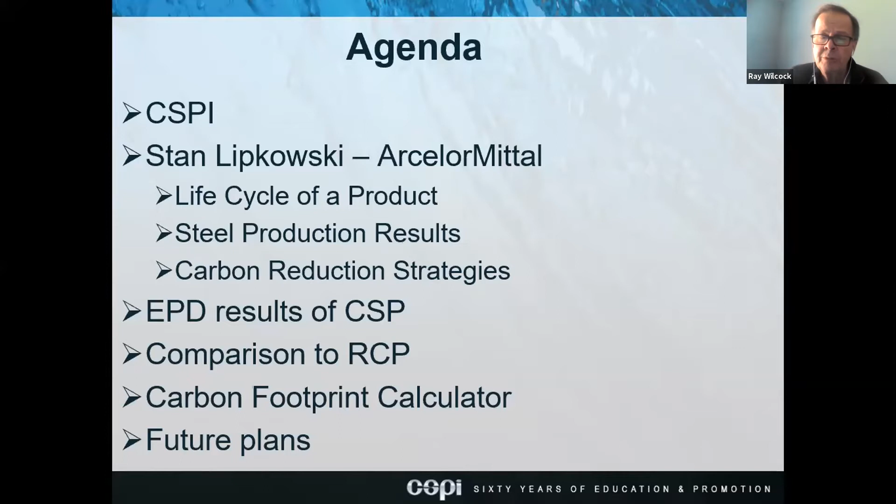The agenda today is I'm just going to spend a couple of minutes on the CSPI, and then I'm going to pass it over to Stan Lipkowski from ArcelorMittal, who's been introduced already. Stan's going to go through the life cycle of a product, steel production results, and carbon reduction strategies, and then he's going to pass it back to me. I'm going to talk about the environmental product declaration results of corrugated steel pipe and structural plate, do a comparison to reinforced concrete pipe, show you a little bit about a carbon footprint calculator, and just talk a bit about future plans.

The Corrugated Steel Pipe Institute represents the manufacturers of corrugated steel pipe and structural plate. Armtec and Atlantic Industries are both national players with plants pretty well right across the country, from Newfoundland to British Columbia. Hubcap and Frontier are both regional players.

We also have in our membership ArcelorMittal Dofasco out of Hamilton, the largest steel producer in the entire world, with something like 60 plants worldwide. We also have Ironside, they make machines. Leland Industries make nuts and bolts. Advanced Coil Industries and Warner Custom Coatings make coatings for material like polymer. AK Steel, a very large steel producer out of the United States, makes aluminized type 2 steel.

We also have members outside of North America, like Velfilm out of Brazil, 2xO which is in Paris, France, Rondell and CMP in Australia, Viacon out of Poland, Marmac out of South Carolina, and Birkenhoek in Amsterdam in the Netherlands. We do a lot of sharing back and forth between the Europeans and the Australians. They learn from us, we learn from them, and we're very happy to have them in our small membership in the CSPI.

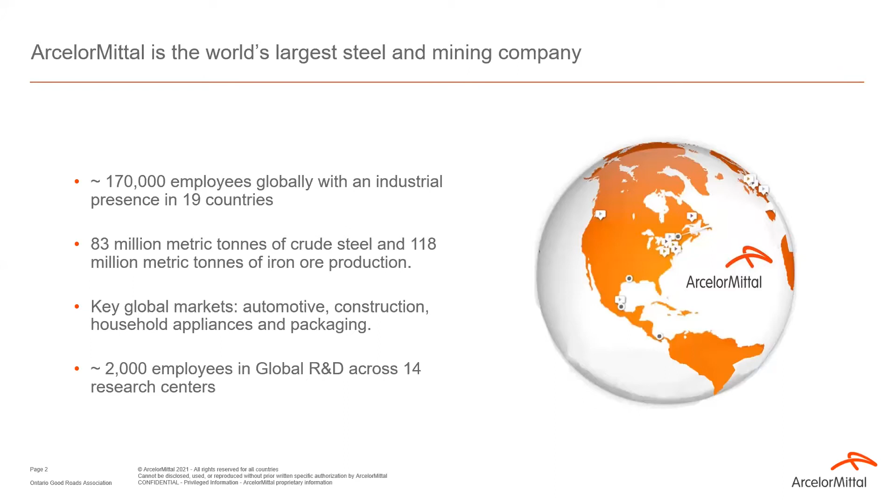Please hold on, everyone, until we... Actually, I was able to flip. It's working on my end, yeah. All right, awesome. What happened? Sorry about that, everyone.

So our footprint in Canada, we have 10,000 employees across Canada, 6,000 employees in Ontario. Our mining facilities are located in northern Quebec, as well as in the Northwest Territories, Baffin Island, very far north. Our steel manufacturing footprint is located in the Montreal area and in Hamilton. Our largest steel mill in Canada, Dofasco, is in Hamilton.

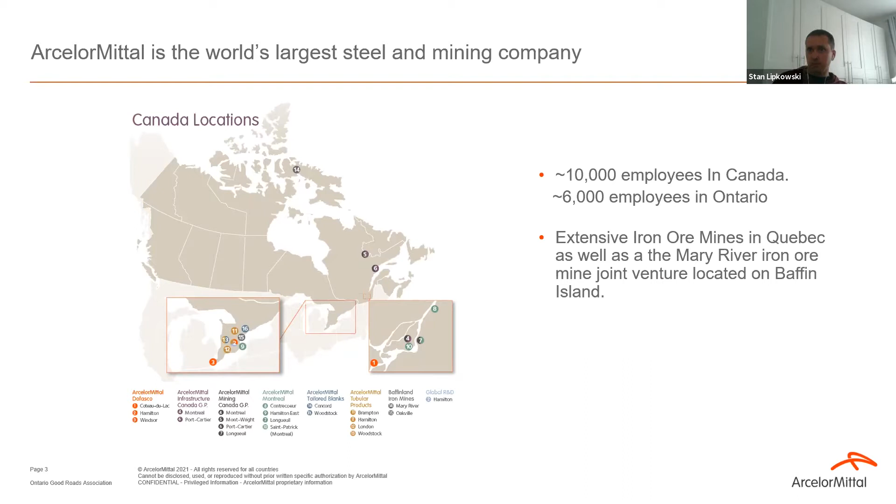Now I'll provide some background information about lifecycle assessment. Lifecycle assessment is a technique that assesses environmental impacts associated with all the stages of a product's life cycle. This includes raw material extraction, manufacturing, transportation, the use, and very important for steel, the end of life recycling. Steel is one of the most recycled materials on the planet. LCA has become the most scientifically credible method of modeling the environmental impacts of a product.

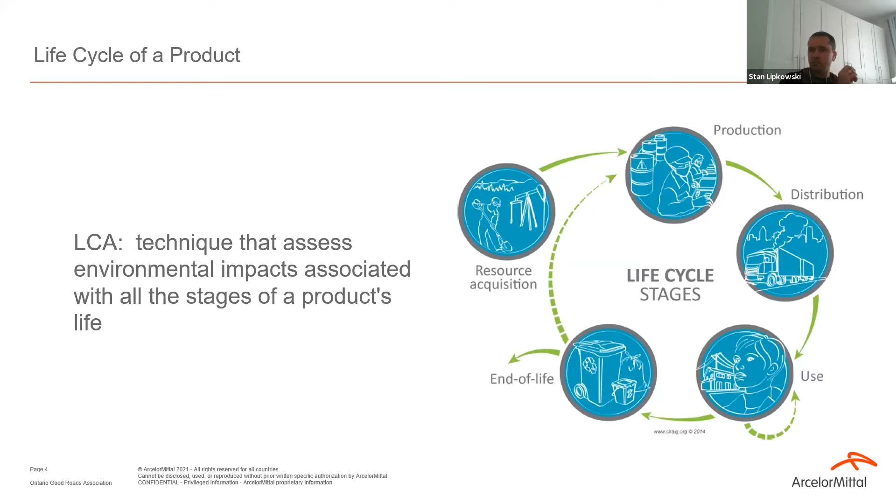Now, to conduct a life cycle assessment, what you need is massive quantities of data. To give you an idea of how much data, when I collect the data for one of our products like hot dip galvanized coil, it requires 1,000 input-output flows. Every single flow then has to be traced downstream all the way to the cradle, to an elementary flow. For instance, at one process in our operations, I collect the quantity of electricity that's consumed. That has to be traced to our grid. Our grid is made up of different forms of electricity production, but let's say a portion of that is nuclear, for example, that has to be traced all the way down to the amount of uranium that's mined. So a massive quantity of data is required, and that data is called lifecycle inventory data.

The other thing that you need is standards that tell you how to conduct that lifecycle assessment, because in the end, these impacts have to be comparable. You have to be able to compare apples to apples. So you have to ensure that they abide by the same rules, and these standards are called product category rules.

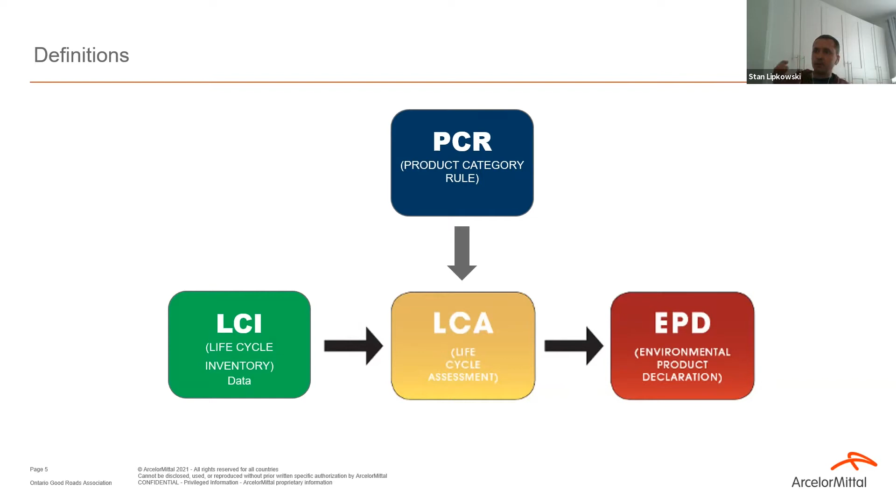An LCA is typically a very long report. It could be more than 100 pages long. Many people aren't interested in all that detail, so that's why they create EPDs. It's a one-page summary of a complex LCA report. It just lists several environmental impacts results associated with the life cycle of that product.

So the EPDs have to abide by a long series of standards. The overarching standard for life cycle assessment is ISO 14044. Then there's ISO 14025 that deals with type 3 certifications of EPDs. ISO 21930 and EN 15804 are specific to the construction sector. And then there's product specific PCRs. For the steel industry, we recently developed our product categories for steel for the North American market. These have to be published every 5 years, so that was recently updated.

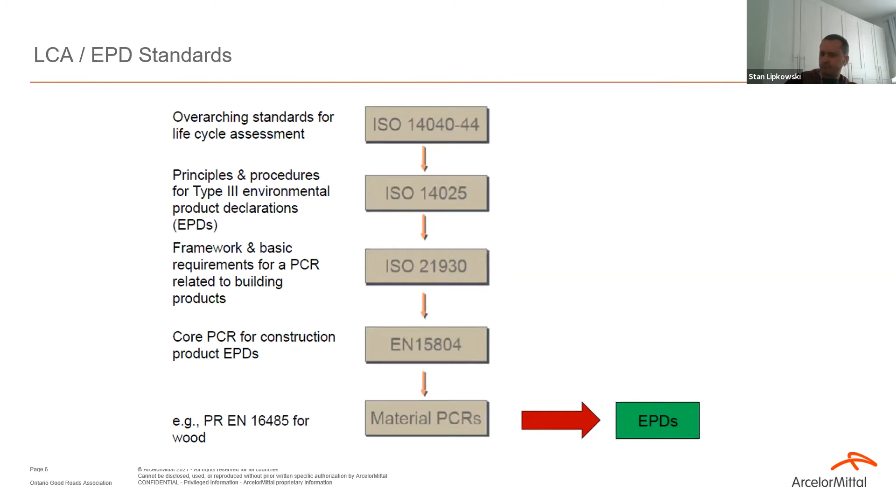Now, to give you an idea what's involved in modeling the life cycle of corrugated steel pipe, I pasted a screenshot of the LCA software I use, GaBi. You can see I start off with a process for hot dip galvanized coil. This is an industry average data set, so it includes the data that I've collected from our site for hot dip galvanized coil, as well as others from other sites across the North American steel industry. Then I modeled the transportation to our culvert manufacturers, and then the end-of-life recycling.

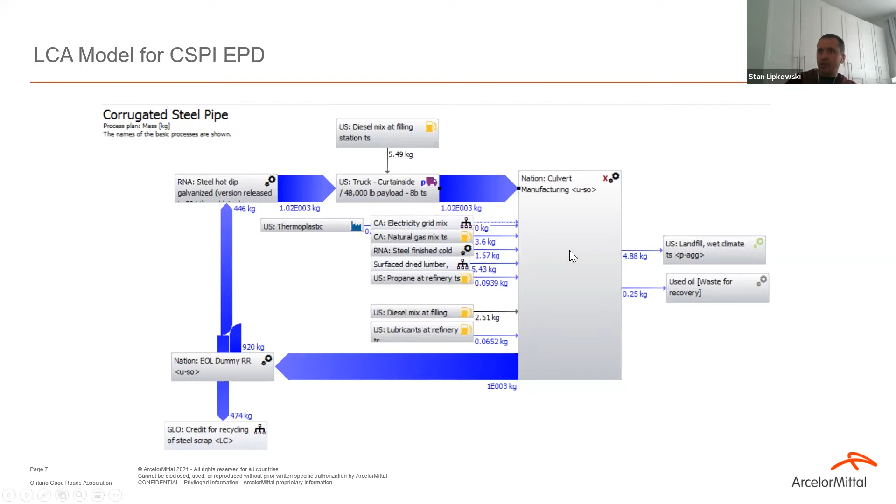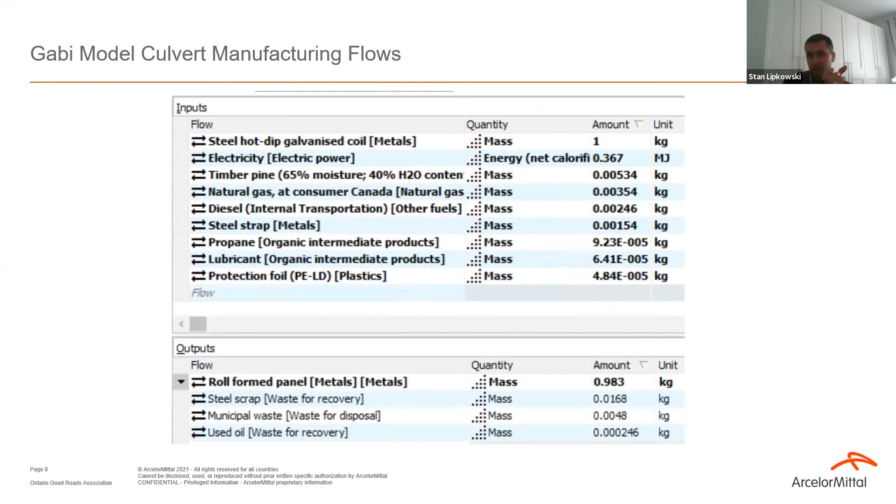Now, if I double-click on that culvert manufacturing process, I get the following information. These are the input-output flows I collected from our customers. So based on 1 kilogram of hot galvanized coil, this is the amount of electricity, the amount of natural gas, propane, and so on. On the output side, the amount of culverts produced, the amount of steel scrap that was lost during the manufacturing process.

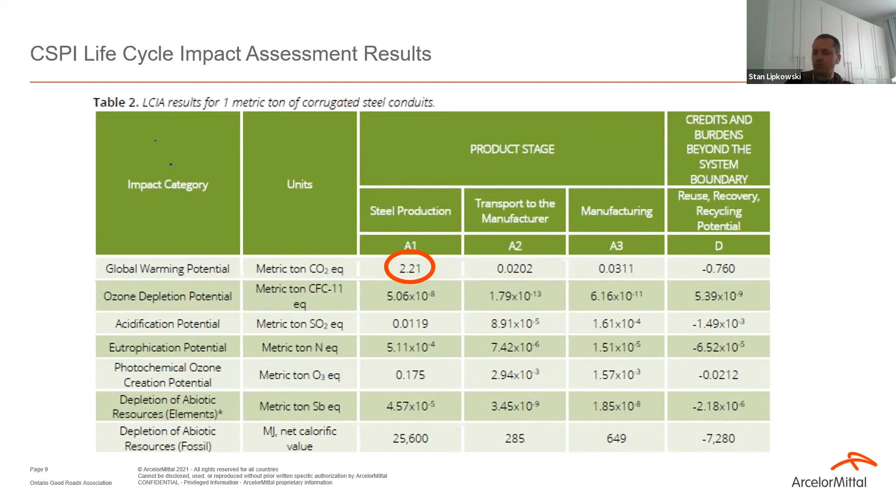Other sectors like power and transportation, they have a bigger share. But in those sectors, there's a green light at the end of the tunnel. For the transportation sector, for instance, there's pioneers like Elon Musk that have led the way to electrify the transportation sector. And the power sector, there are renewable technologies like wind and solar that have become cheaper to produce than burning fossil fuels. But steel and cement, those sectors are called hard to abate. It's much more difficult to decarbonize those sectors, so it's a big challenge.

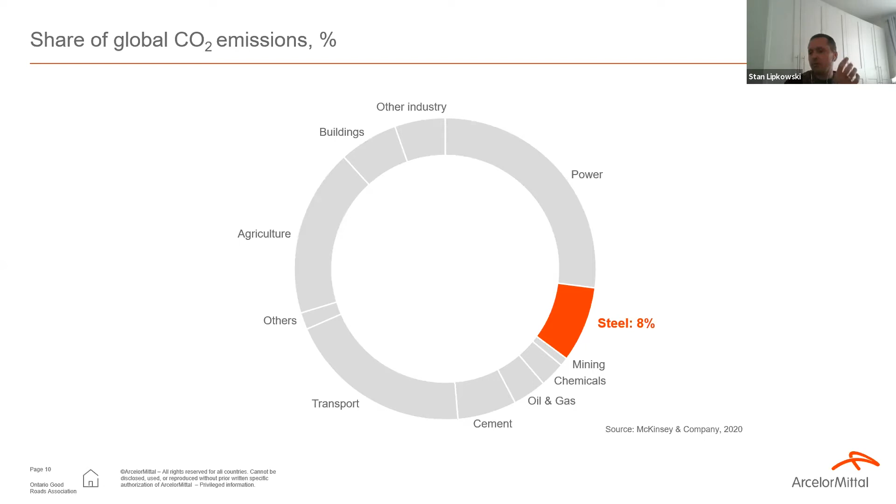But at ArcelorMittal, we're a large company. We have the global scale. We have greater technical resources than many of our competitors. So we're very well positioned to lead the way to clean up our industry.

Now, before I get into talking about our decarbonization strategy, first I have to provide some background on how steel is produced today. Steel is produced using 3 technology routes. The first is the blast furnace. Here you use coal to reduce iron ore. This is by far the most energy efficient way of producing steel, but unfortunately it's the most carbon intensive way. On average, globally, a blast furnace emits 2.3 tons of CO2 per ton of steel produced.

Now the other 2 technological pathways of producing steel are through the electric arc furnace. This is a technology that's been around for 100 years, but it became more prevalent in the 60s when greater stockpiles of scrap became available. In an electric arc furnace, there are 2 feedstocks you can feed into it. One is iron ore that's been reduced with natural gas—it's called DRI, directly reduced iron. When you feed that in, your emissions are 1.5 tons of carbon per ton of steel produced. The other option is to make steel by melting scrap in an electric arc furnace, where the number drops to 0.8 tons of carbon per ton of steel produced.

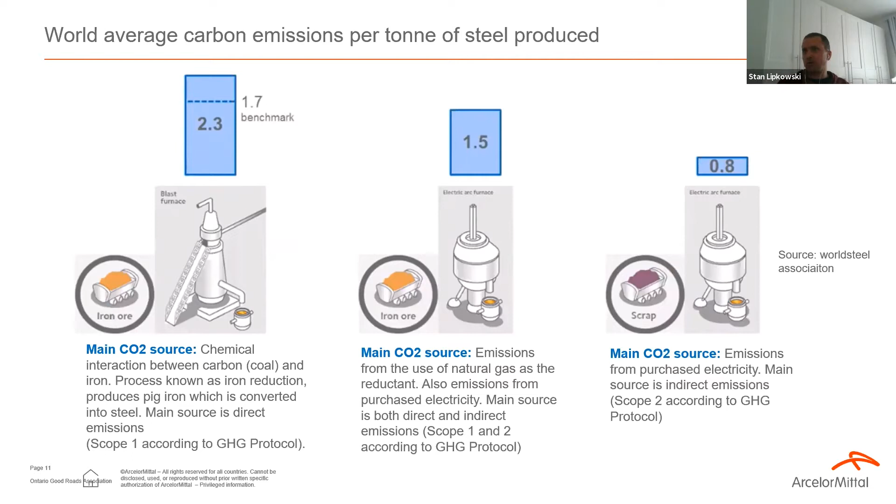And so we definitely have to decarbonize primary steel production to meet our Paris Agreement objective to be carbon neutral by 2050.

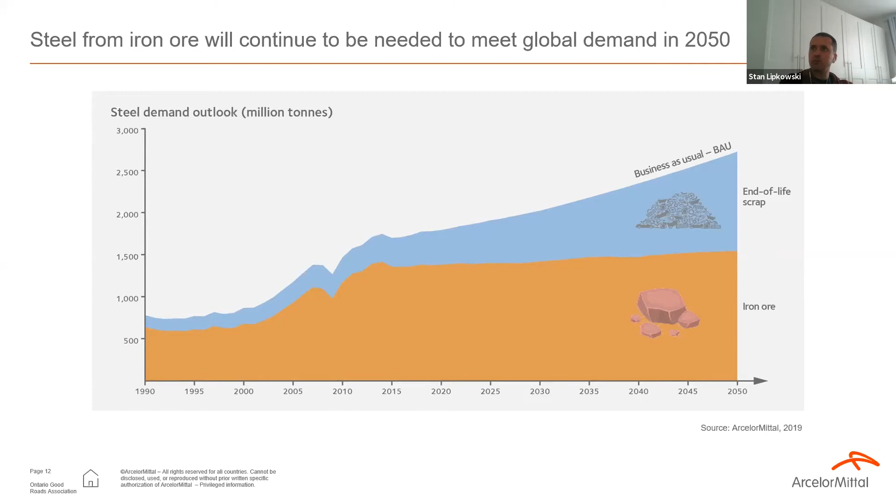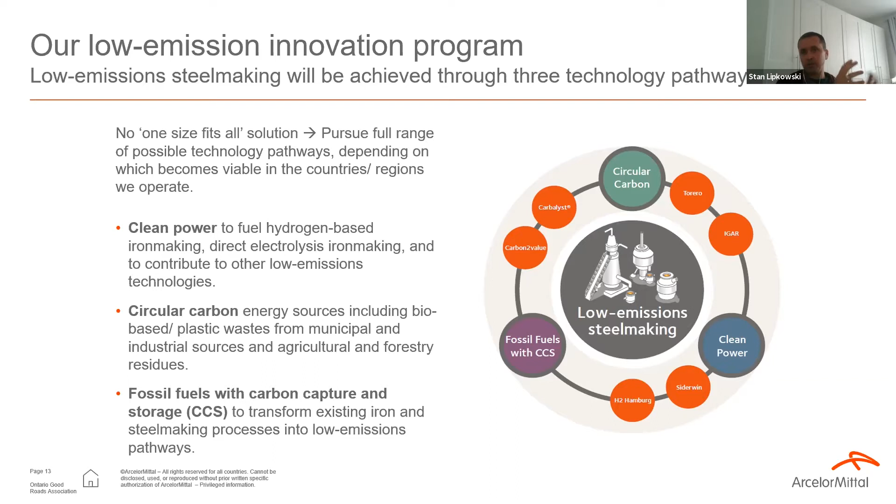So in 2019, we published our climate action report, and there we outlined how we plan on decarbonizing our primary steel production, using three pillars in our strategy. The first is clean power—we're going to need massive quantities of clean power to produce green hydrogen. The second is circular carbon, where we will be substituting our coal with bio-based materials and plastic. And the third is carbon capture and storage—we're going to have to capture our emissions and store them.

So this slide goes into more detail about our smart carbon technology pathway. We'll be feeding plastics or bio-based materials, so waste wood. Here in Ontario, we have massive quantities of wood going into our landfills from residential construction and demolition waste. So we'll be sending those materials into a pyrolysis process.

From this process, we'll have a high carbon, very high quality carbon product that we can feed into our blast furnaces. Then we'll be capturing that carbon, and we've partnered right now with a company called LanzaTech that takes that carbon, and through a special fermentation process using bacteria...

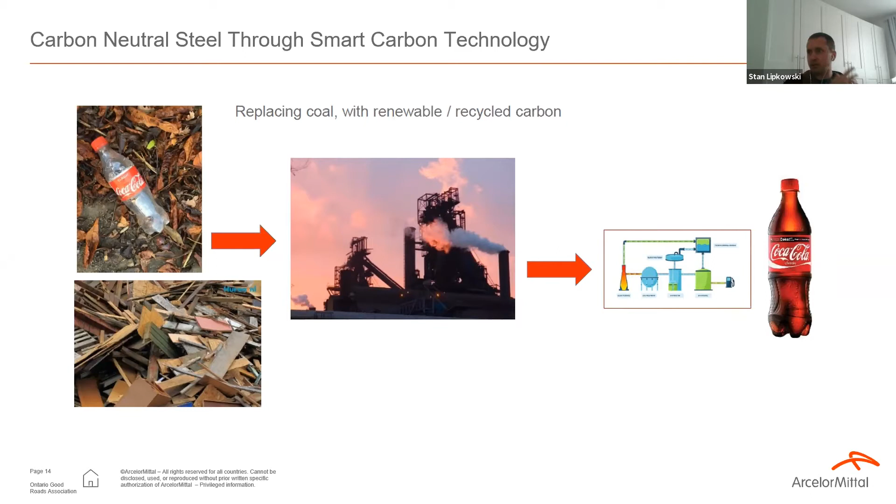...they create ethanol, and ethanol can be used to create several things. It can be used to create fuels. But one of the applications, you can use ethanol to make plastics. So this is a truly circular process, because at the end of its life, that plastic can be recycled back into our blast furnace. It solves another big environmental issue, the plastic waste issue, because plastic isn't a very recyclable material.

But the problem with this technology is that it's not enough. Our blast furnaces emit far too much carbon, so it's only part of the solution.

So this is how we envision our blast furnace of the future. We'll be feeding hydrogen into our blast furnace as well. And at first, this will be what's called blue hydrogen.

So hydrogen has been color coded. Gray hydrogen is hydrogen produced from natural gas production. Blue hydrogen is hydrogen produced from natural gas, but the emissions are captured and stored. And green hydrogen is hydrogen produced using clean electricity.

But we don't envision large quantities of green hydrogen being available until well after 2030. So until then, we'll be using blue hydrogen to feed into our blast furnaces. We'll also be using the circular carbon process that I've already described, and there'll still be some leftover emissions that we'll have to capture and store permanently.

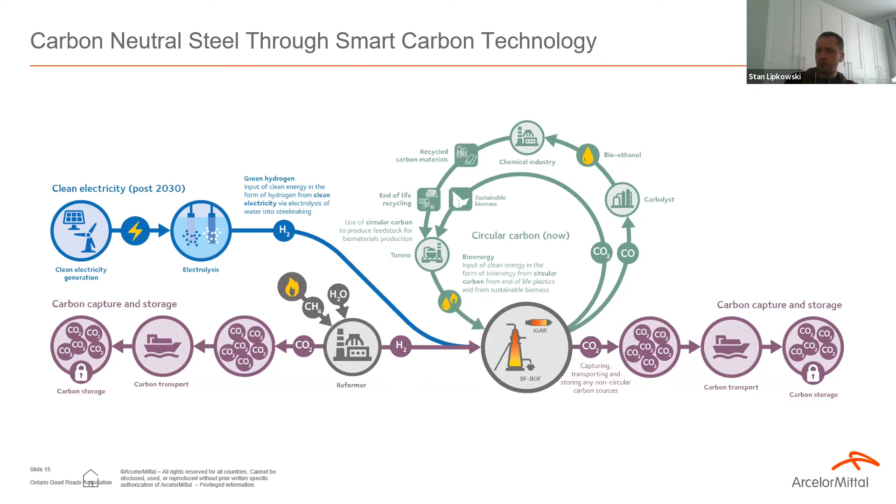So now I'll talk about where we are currently. We have several pilot plants, primarily in Europe. In Ghent, we have a Torero process plant. This is where we create biochar. We have one reactor that will start operating in 2022, and a second one in 2024.

In Ghent as well, we have our Steelanol production. This is where we partnered with LanzaTech. We captured the emissions, and through that fermentation process, we'll be creating 80 million liters of recycled carbon ethanol. It's a 165 million euro investment, production is well underway, it's a massive plant they're building, and production is expected to start next year.

In France, in Dunkirk, we have a project called IGAR, using our coke oven gases, recycling them. Coke oven gas is very rich in hydrogen, I think 60% hydrogen. But we use it at most of our facilities to burn and generate electricity, which creates emissions. The other option is to stop producing electricity with it and feed it into a blast furnace instead, to significantly reduce blast furnace emissions.

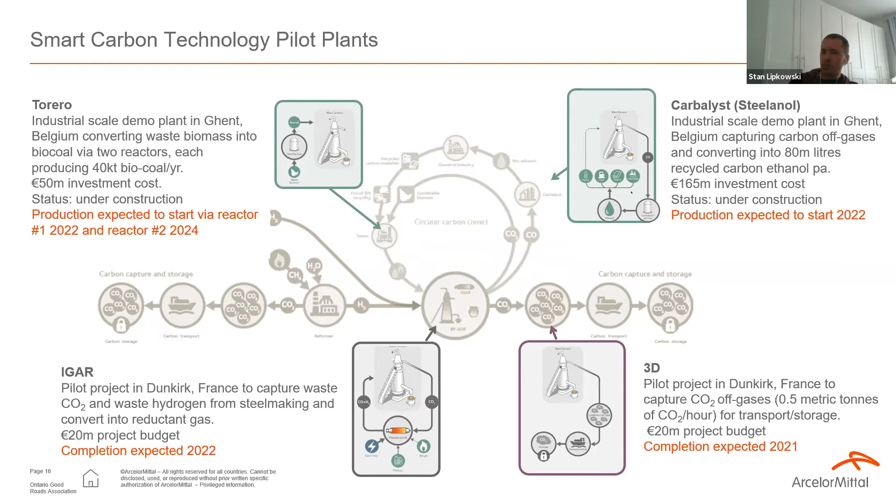So fully implemented, the smart carbon route will result in 250 kilograms of carbon neutral cement. Our blast furnace produces a byproduct called slag. That slag is used today to make significant quantities of slag cement, but the problem with that slag is that it has a high carbon content. So now we'll be able to provide carbon-free slag to the cement industry so they can reduce their footprint.

It also produces 200 kilograms of carbon neutral plastics. In one study, Europe showed that if the entire steel industry converts to smart carbon, it'll be able to supply more than 60% of Europe's polyethylene-based plastic needs.

And finally, because we're using biomass material, the steel industry will be able to remove carbon from the atmosphere. That biomass normally would have its carbon emitted in a landfill, but we're storing it instead. So we can actually be net carbon negative using this technology.

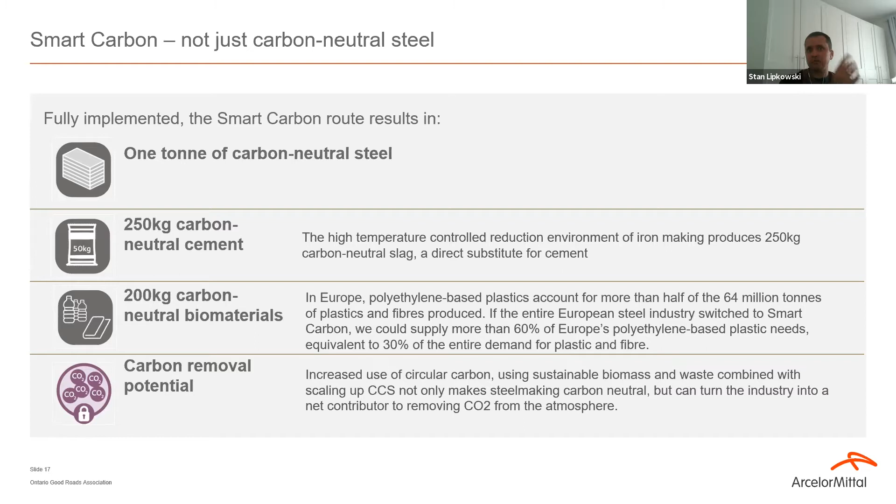Finally, one last route is the innovative DRI route. This is the most promising route for decarbonization, but again, it's dependent on massive quantities of green hydrogen being available. We have a pilot site in Hamburg, and production for this pilot facility is expected to start in 2023.

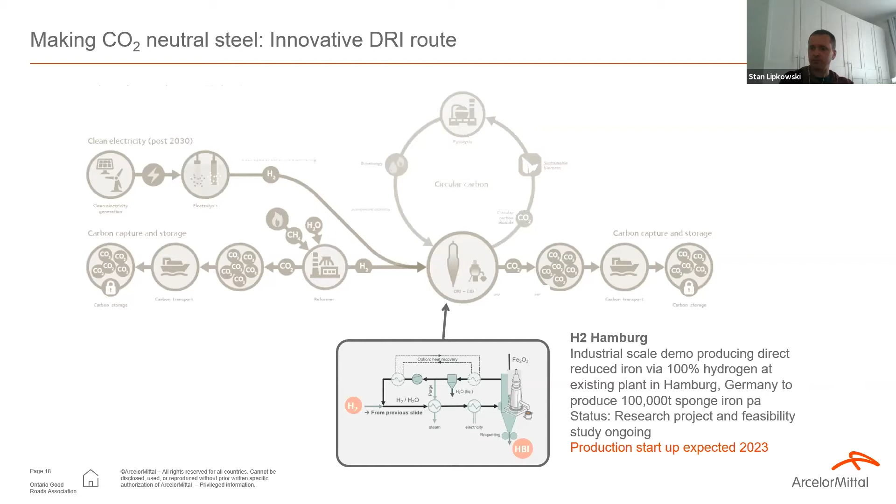So I've just briefly skimmed over our decarbonization efforts, but we've published reports that go over these technologies in much more detail. You just have to Google ArcelorMittal Climate Action Report, and you'll find it easily. There's also our integrated annual review that provides a lot of information as well.

One other thing I want to mention is that the best way to decarbonize is not to produce the emissions in the first place. One way to do that is to reduce the amount of steel that we're using in our steel end-use applications. We've been doing this for years in the automotive sector.

I remember when I started working at Dofasco 20 years ago, the average tensile strength of product going into the automotive industry was about 600 megapascals. Today, we're producing massive quantities of 2,000 megapascals. The result is that we can produce stronger, lighter, and much more carbon efficient cars.

We've been doing this for several years, and this program is called S in Motion. Our crowning achievement there has been when we were able to convince GM to stick to steel after Ford decided to go to aluminum on the F-150. We were able to show that the steel truck is much more material efficient, more cost effective, and the embodied carbon is much lower when you look at it from a life cycle perspective.

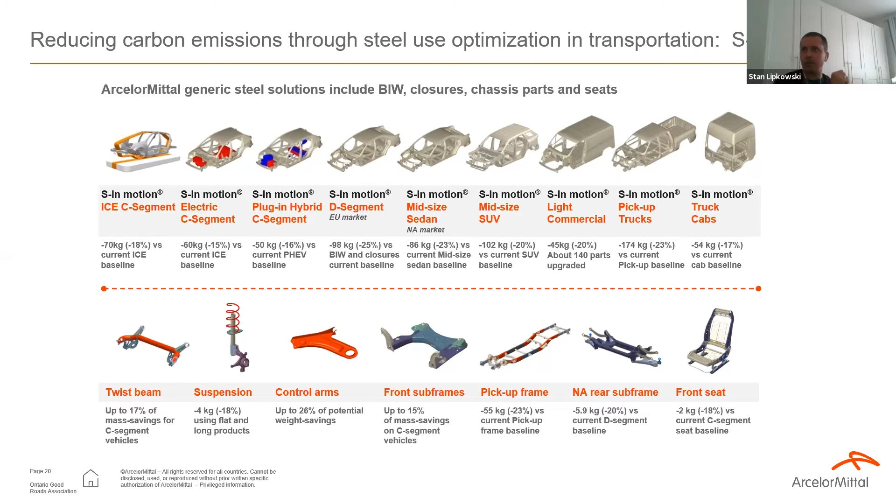It was a very successful program, and we took what we learned there and applied it to building construction. This program is called Steligence, and we've partnered with leading architectural and structural design firms globally. We asked these structural engineers, why are you designing your buildings the way you are? The response we often received was that it's just the way we've always done it.

But then we taught them, you just can't do that anymore. We have higher strength steels that can optimize those structures. For instance, in the case of a steel beam or column, quite often it's a 1-for-1 substitution, meaning if you have a high strength 80 KSI steel beam and you substitute for a 50 KSI steel beam, 50 divided by 80 is the quantity of steel that can be saved in that column—greater than 30%.

Also, you can reduce your floor joists by a few inches. You may ask, well, what's a few inches? But in a building that's 50 stories high, those few inches add up to saving a few stories. That's that much less concrete you have to use in the core, that much less material you have to use in the facade. And it all adds up.

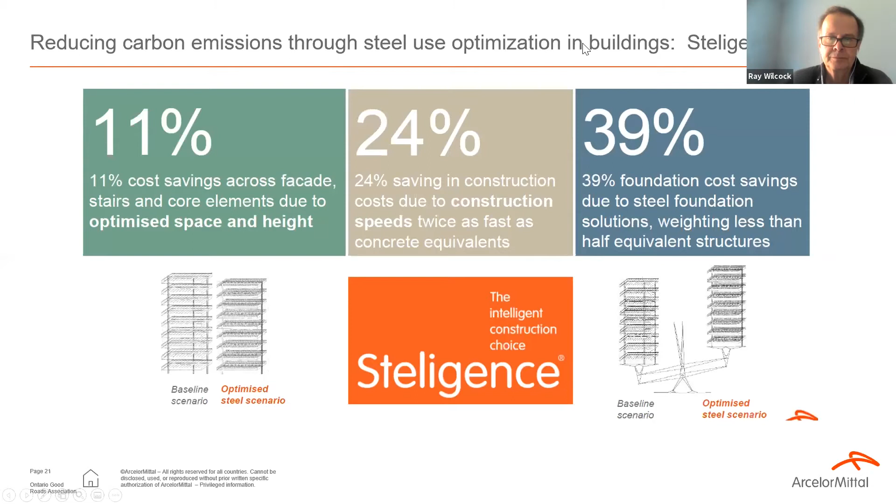I'm going to basically go through the environmental impact of corrugated steel pipe products now and future plans. There's a couple of pictures, as you can see down below, of corrugated steel and also structural plate.

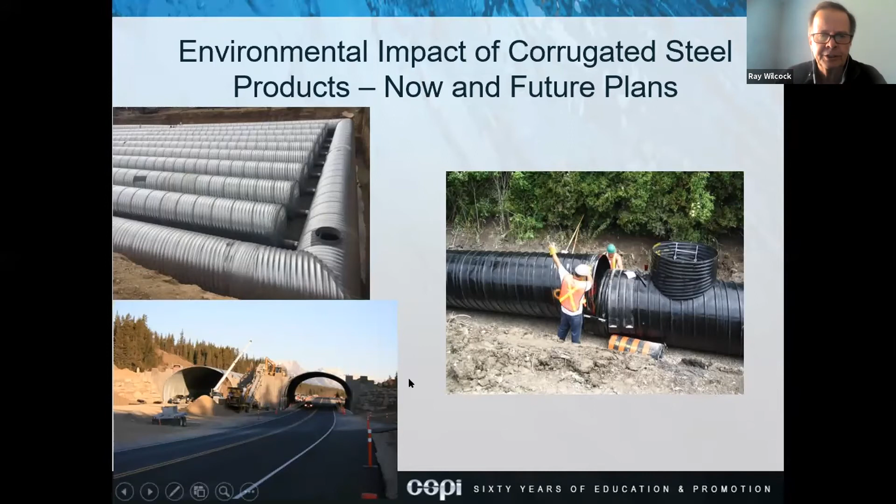I think it's important to remember that when you look at an environmental product declaration, it is a snapshot in time as to what impact one's product has on the environment, because it can change from year to year, and EPDs are normally done over a 5-year period. So for instance, the next one we will do is in 2023. So what I'm showing you is probably a couple of years old, but it's the latest information with regards to the impact. The declared unit is 1 metric ton.

So that's what we looked at. Stan showed you this before. This is the results of our EPD. You would find this on page 8 or 9 of the third-party report that is done. It's not very easy to understand just by looking at it here. You have the impact category down the left-hand column, then units, the product stage, and the reuse, recovery, recycling potential.

But when you look at some of the numbers there, like in the second line, ozone depletion potential, 5.06 times 10 to the minus 8. I'm sure all the people attending this webinar will understand that, know how to compute it, and so forth.

Think of how many people don't even understand what that scientific notation actually means. It's not easy to look at and get a grasp of what it all means. So I'm going to make it easy for you as I walk through the next couple of slides, because I've done all these calculations. But that's my one rant about the EPDs at this point in time. My hope is that in the future, these scientists, environmental and climate experts, and engineers make it a lot easier for the reader to look at.

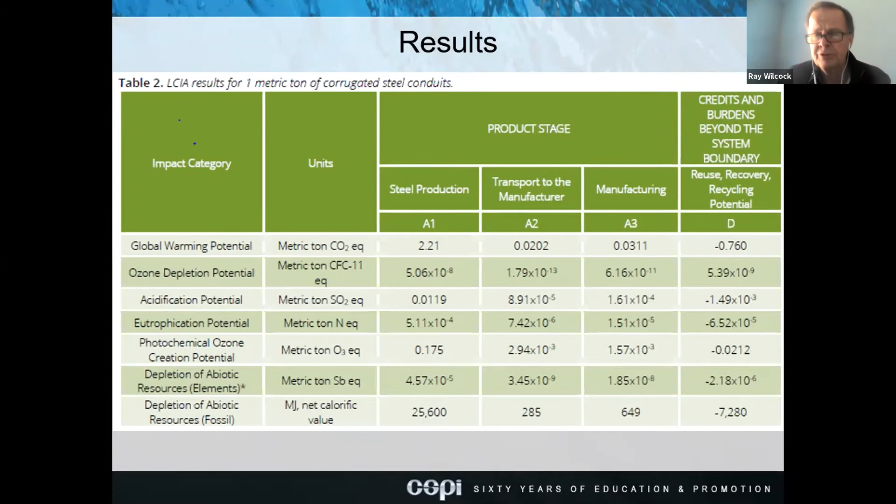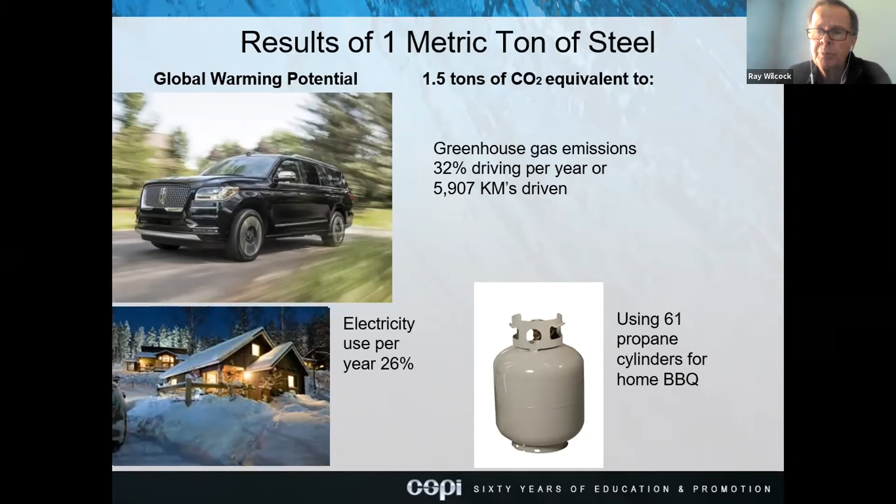The results of 1 metric ton of steel, our global warming potential, we would produce 1.5 tons of carbon, which is equivalent to driving an automobile 32% of the year, or driving it 5,907 kilometers, or heating that home for a quarter of the year, or using 61 propane cylinders for your home barbecue.

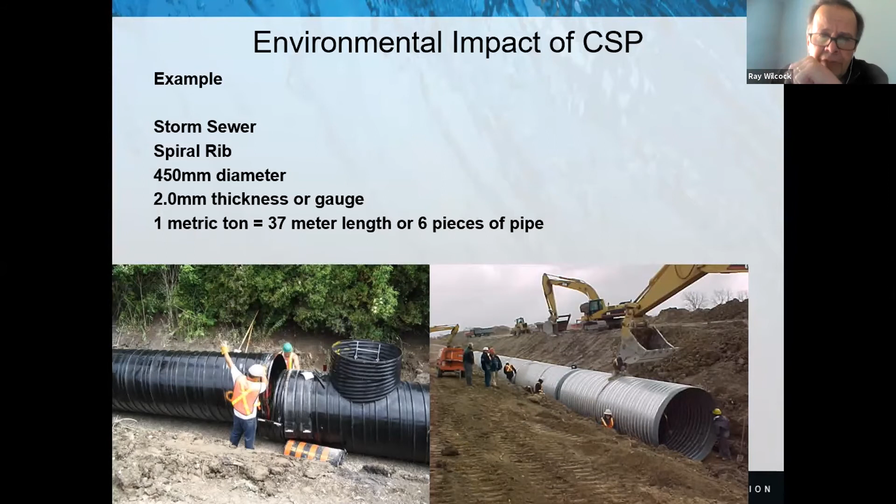Let's get a little more specific and look at the environmental impact of corrugated steel pipe using an example storm sewer. We use a spiral rib pipe, smooth on the inside, ribbed on the outside, with a Manning's flow of 0.012, a 450 millimeter diameter pipe, with a thickness of 2.0 millimeters. 1 metric ton of steel would produce 37 meters length, or 6 pieces of pipe using a standard length of 6 meters. Now I'm going to give you the impact on the environment of 1 meter of that particular size and thickness.

1 meter of that particular diameter corrugated steel pipe would produce 40 kilos of carbon. If you take the same 1 meter of pipe for the same diameter, a reinforced concrete pipe would produce 67 kilos. So it's like driving a car 158 kilometers versus 264, or using 1.6 propane tanks versus 2.7 propane tanks.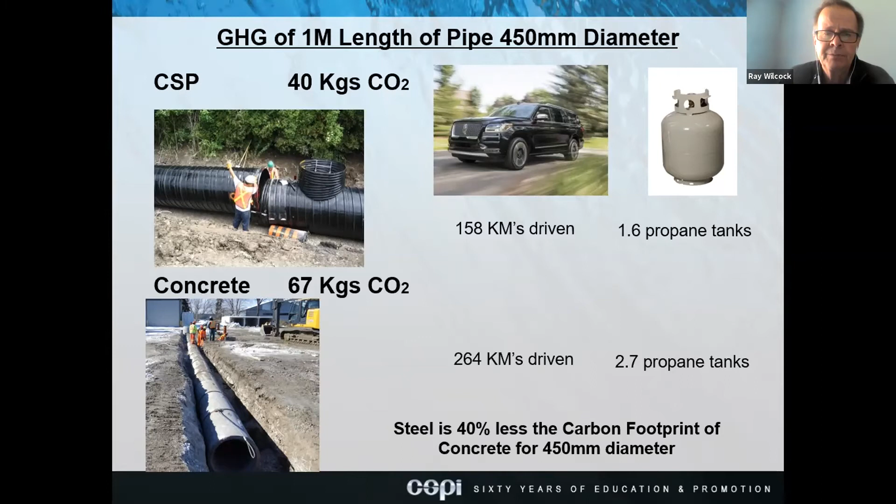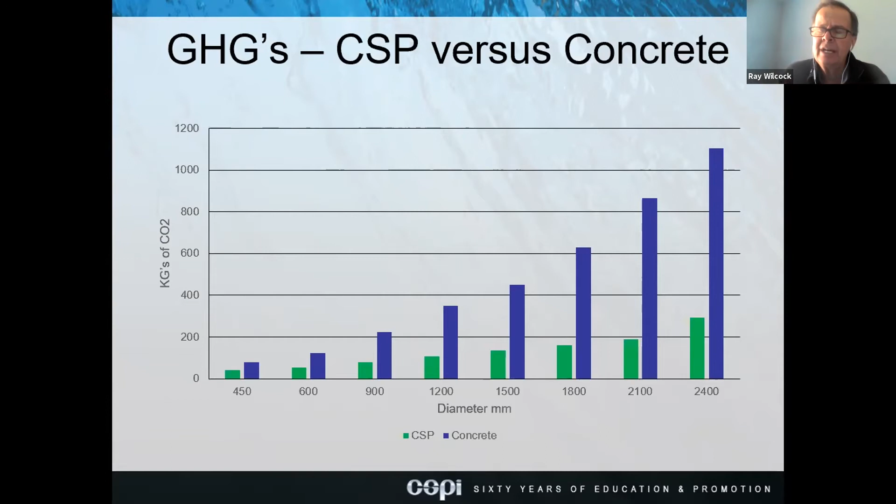Right now, the snapshot in time is steel has 40% less carbon footprint than concrete for that particular diameter, 450. If you extrapolate that out from 450 all the way up to 2400, you'll see kilos on the y-axis and diameter on the x-axis. Corrugated steel pipe is the green bar, concrete is the blue bar. The green bar rises slowly, but the blue bar rises much faster. When concrete gets into the very large diameters, just because of the mass and weight, its carbon footprint increases dramatically over corrugated steel pipe.

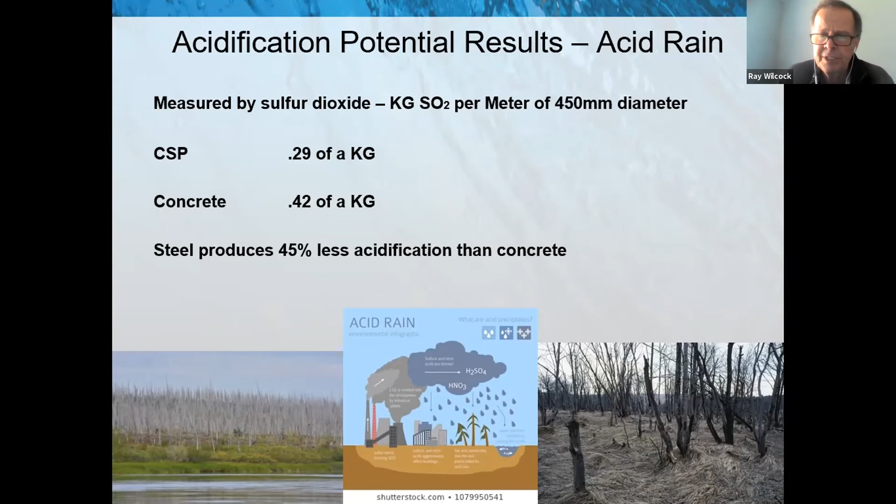If we look at other things besides carbon, there's acidification or acid rain, measured by sulfur dioxide. For that 1 meter of pipe, corrugated steel would produce 0.29 of a kilo, concrete 0.42 of a kilo. Steel produces about 45% less acidification than concrete. There's a couple of pictures of acid rain below and what it does to our forests.

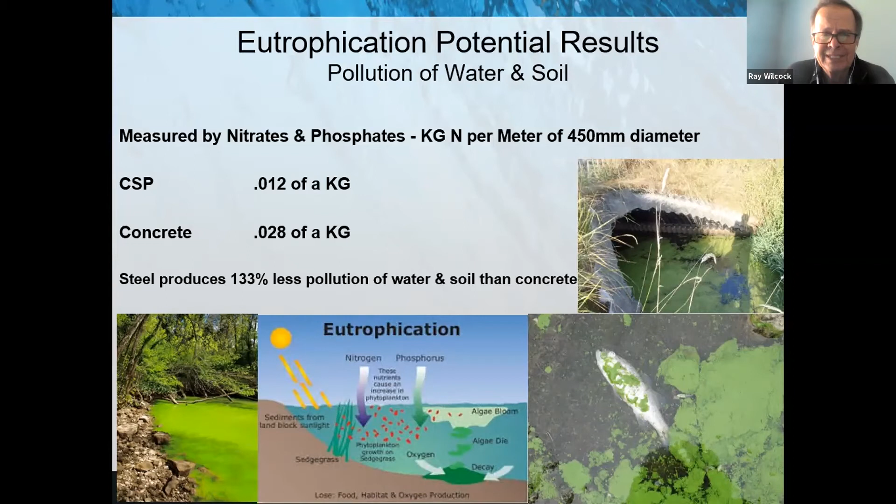Another area they look at is eutrophication, which is pollution of water and soil, that green you can see on the water below. It's just yucky stuff, measured by nitrates and phosphates. CSP would produce for that 1 meter of 450 millimeter diameter pipe 0.012 of a kilo, concrete 0.028 of a kilo. Steel produces about 133% less pollution of water and soil than concrete pipe for that particular diameter.

If I may interrupt, there's a question asking whether we have the same comparisons between corrugated steel and concrete including HDPE pipes as well. You're talking about high density polyethylene. At this stage we do not, and the only reason is we could not find an environmental product declaration out there for HDPE. We could find one for PVC, but PVC is more for sanitary sewer pipes and smaller sizes, so we didn't compare ourselves to that. At this stage, because we could only find reinforced concrete pipe, we compared ourselves to that, and a third party did that, which I'll mention in a minute.

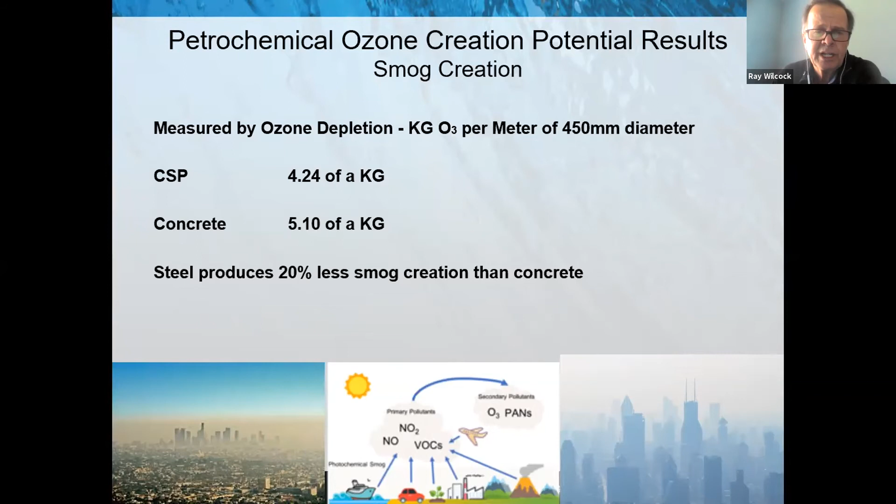With regards to smog creation, and everybody knows what smog is, CSP would produce 4.24 of a kilo, concrete 5.1, so steel produces about 20% less smog creation than concrete. The last thing I'll mention is the depletion of abiotic resources, or fossil fuels.

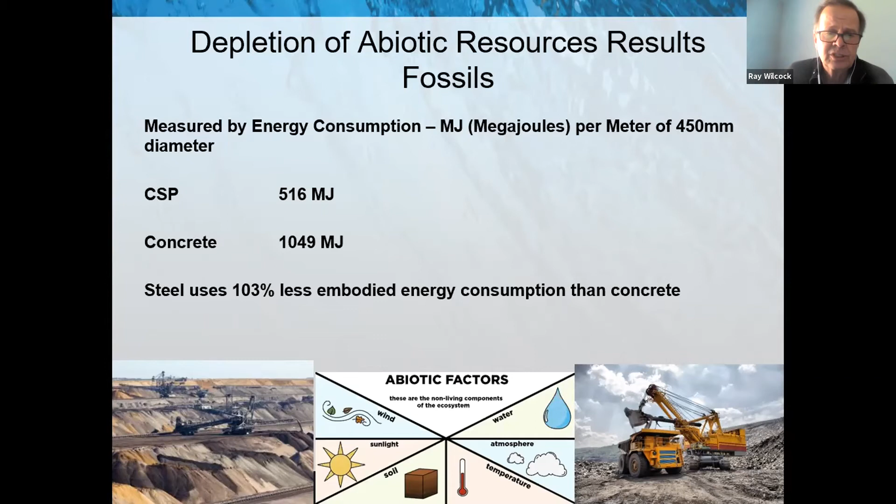It's measured in megajoules. CSP for that 1 meter would incur 516 megajoules, concrete 1,049. So steel uses about 103% less embodied energy consumption than concrete.

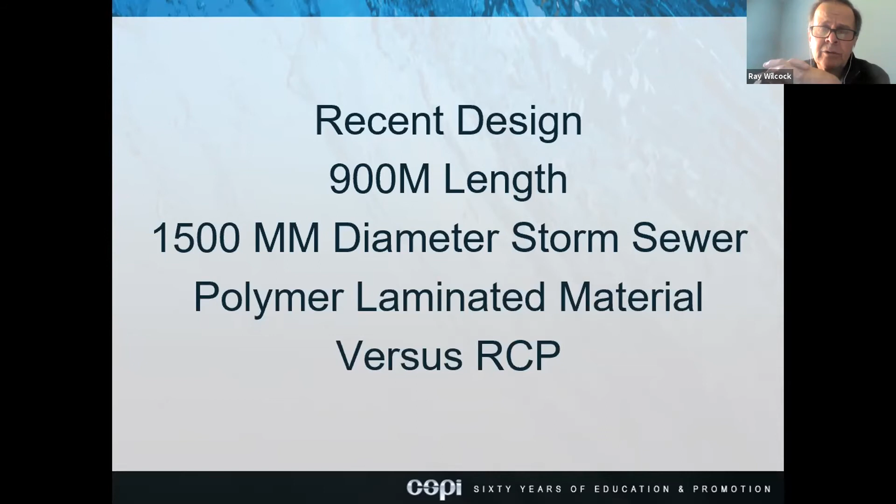On a recent design, I had a question from a consultant, and I want to show you the impact of a larger diameter and what the mass is versus corrugated steel or spiral rib. It was a recent design, 900 meters in length, 1,500 millimeter diameter storm sewer, and I was asked to compare a polymer laminated material versus a reinforced concrete pipe.

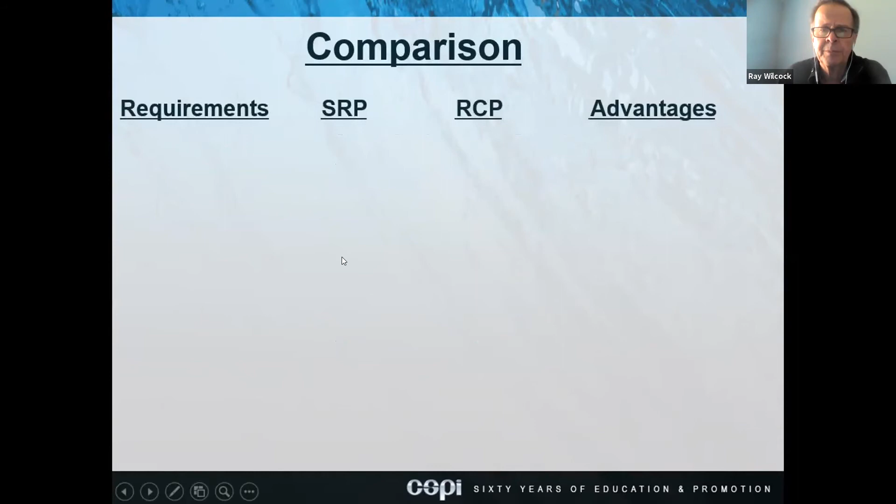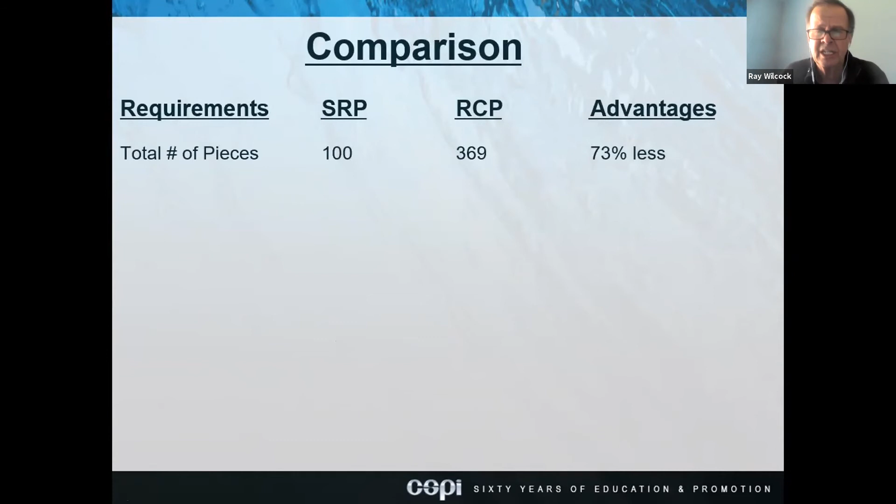Just to show you the comparison of requirements: a spiral rib pipe total number of pieces was 100, versus RCP at 369, 73% less. The reason is spiral rib pipe comes in longer lengths, anywhere from 6 to 9 meters, whereas a reinforced concrete pipe has a 2.44 meter standard length.

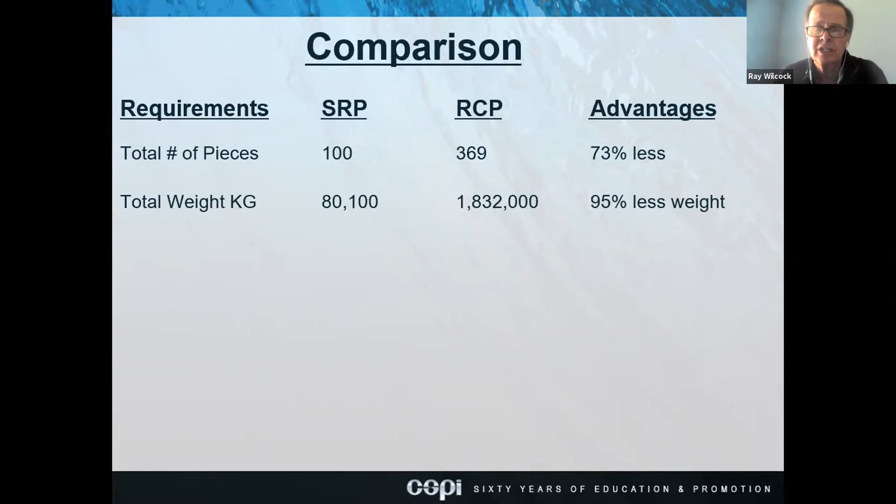And then here's the big catch. It's the total weight in kilos for that particular job: 80,000 kilos for spiral rib versus 1.8 million for reinforced concrete pipe. So the advantage is 95% less weight. If you go back to that chart where you go up in diameter, you get a huge difference with regards to mass, and that's why the carbon footprint at this point in time is so much lower. There are other factors here too, like total number of trucks, so less transportation and so on.

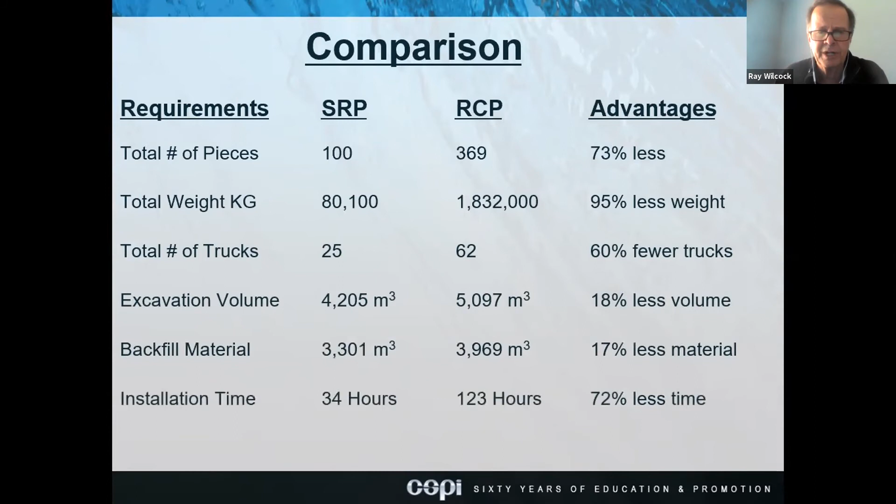But I won't go through all of this in detail because that's for another time. So the one I was after was what was the carbon footprint or carbon emissions on this particular job if you were to use spiral rib versus concrete pipe.

The CSP would be 121 metric tons of carbon, concrete would have produced 405 metric tons. That's like driving a car 476,000 kilometers, or heating 21 homes, versus the numbers you can see down below. So in this particular job, steel is 29% the carbon footprint of concrete for this project, or 334% less.

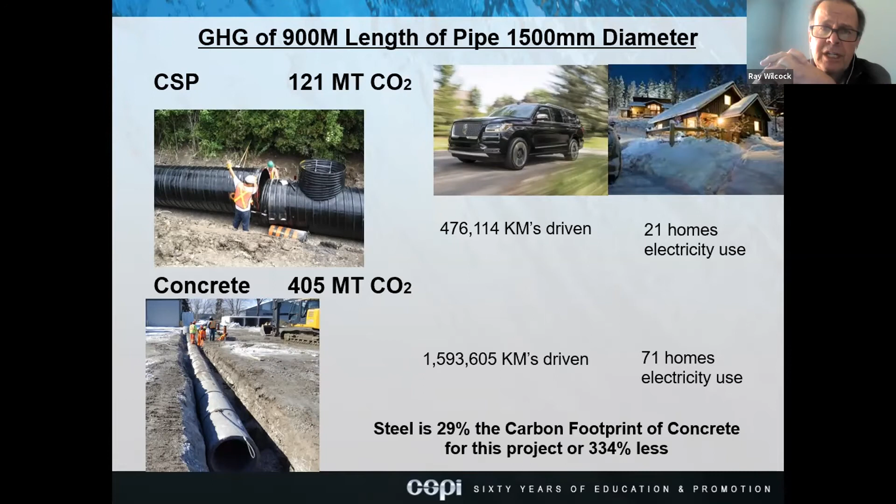If you wanted to refute what I've said or whatever, this is all backed up by third parties. It's not just me doing my own comparison and my own study. We've done a lot of work with different companies out there. There are a number of companies in North America who do this type of life cycle analysis work.

We use SCS Global to produce our environmental product declaration. We used Groupe AGECO out of Montreal, and they did a comparative life cycle assessment of steel versus reinforced concrete pipes. This is where you have three experts: a concrete expert, a steel expert, and a chair who's a life cycle practitioner and expert. They review all of the information and more or less confirm or do not confirm the report. It's about an 80-page report.

If anybody's interested in looking at it, it's available to each and every one of you. You can go to www.cspi.ca, click on sustainability in the resources section, and you'll find all the reports there for downloading.

A couple of other things I wanted to mention. We have an environmental calculator there also. You can go in, let's say you're looking at a job and you wanted to know the carbon footprint difference between the two materials. With a drop-down menu, you can put in your diameter in millimeters, starting at say 300, going up to 3,000 millimeters or whatnot, and length in meters, whatever your project is. I just put 6 there, but it could be anything you want.

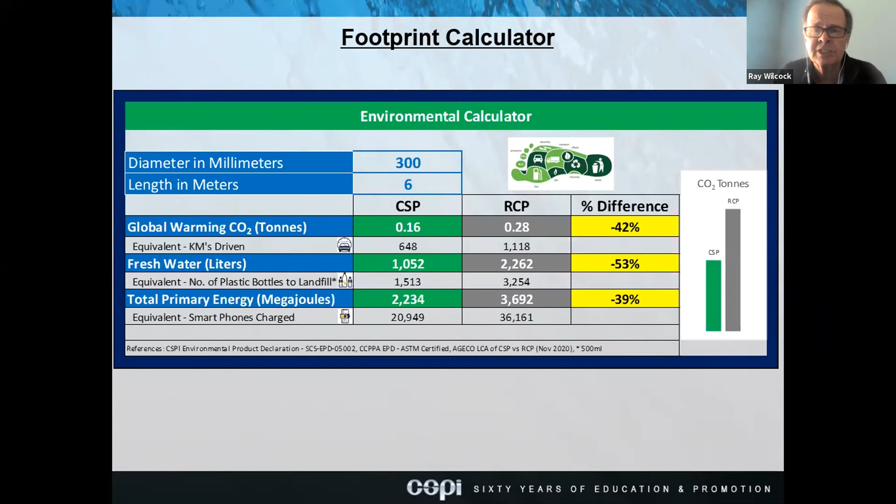Were both service lives equal in the comparison between concrete and CSP? Yes, that's how they did it, and that's how it's confirmed in the third-party review, third-party study. So we had to go up in thicknesses and gauges to meet those different material service lives and so forth. Okay, thanks Ray.

Just to show you some of the things going forward, transportation is a big thing, so alternative methods are being looked at. As Stan mentioned, with electrification taking place, we're looking at electric vehicles. Within the manufacturing plants, our members are looking at retrofit of plants and working towards becoming carbon neutral.

Every member in the Corrugated Steel Pipe Institute has committed to the Paris Accord, which Stan has mentioned, being carbon neutral by the year 2050. But many members have taken steps right now to move that plan forward, like electric vehicles, electric forklifts versus using propane or gas. And then the other thing is capturing, recycling, and elimination of all natural gas, oils, or lubricants, and propane used in the plants with alternative technology.

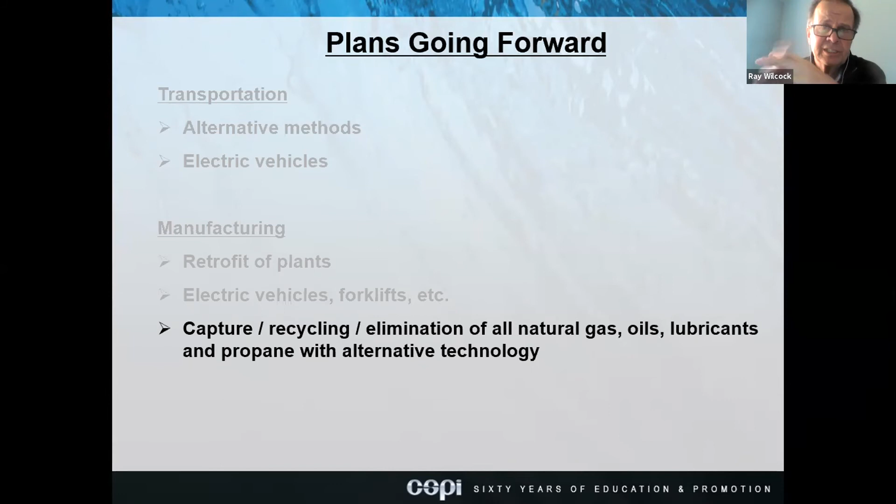So many of our members now, rather than just doing a profit plan every year where they talk about their capital investments and how much they're going to sell, now the carbon footprint and carbon reduction is part and parcel of their planning process going forward.

So people are going to have to scramble if they want to participate in state contracts, they're going to have to meet their guidelines. In Canada, with the federal government, we have what is called the low carbon assets through life cycle assessment. But nevertheless, there's a lot of talk. You hear politicians standing up and beating their chest, stating they're committed to climate change and carbon reduction, but if they don't come up with legislation that drives this and makes it happen, it's going to be a tough thing to see follow through.

We have carbon taxes in Canada, and that's somehow going to make people think about changing their buying practices in the future. But nevertheless, there's going to have to be much tougher legislation to make this happen if we're going to meet the Paris Accord. And the one thing I mention here is the city of Calgary.